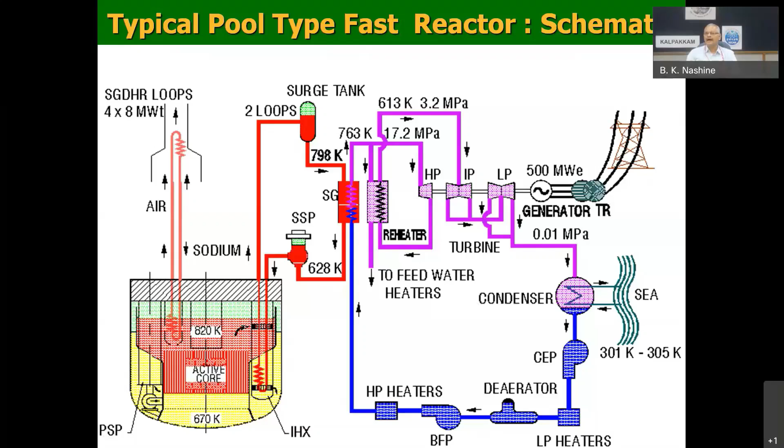The sodium-cooled fast reactor comes in the second stage of the Department of Atomic Energy's program, where the schematic is shown to you, and the coolant used in this reactor is sodium. The fuel is kept in a pool where sodium acts as the primary coolant, and there is a secondary coolant, also sodium, which takes heat from the primary and transfers it to the tertiary, where water is converted into steam, and then finally runs the turbine which generates electricity. So sodium plays a very important role in the fast reactor program.

To have this fast reactor program successful, we have to carry out various tests in a sodium loop. The characteristic of sodium is that it is a very good coolant with very good heat transfer capability. At the same time, sodium is chemically very reactive, and the operation of the sodium loop and the reactor is around 600 degrees centigrade. So any component going into the reactor has to be tested thoroughly before going into the reactor. Hence this requirement of the sodium loop comes.

Apart from that, there are various components which are conventionally used in other engineering systems but cannot be used in a sodium system. So they have to be designed to make them compatible with sodium. An example is different types of mechanical pumps as well as electromagnetic pumps. Now the topic I have chosen, my field of work, is the electromagnetic pump. I am switching over to that.

This is the basic characteristic of the electromagnetic pump: it doesn't have any moving part, and that helps this pump to be made very hermetically sealed, and leakage of sodium is avoided.

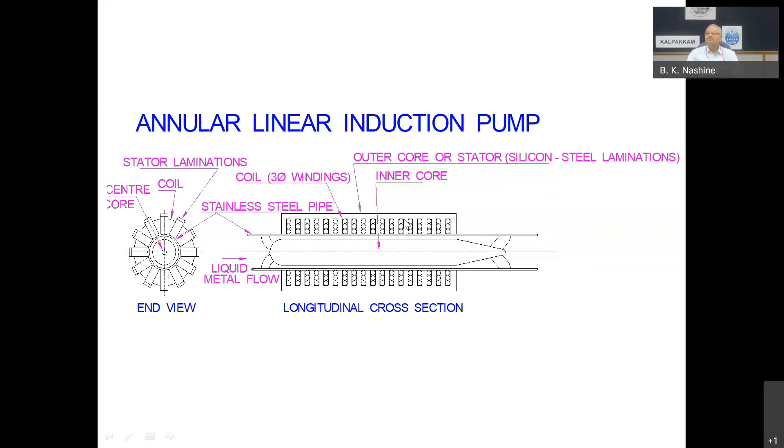This is the same principle as indicated in the previous slide. You can see that the magnetic field is radial and the current produced is circular. The interaction of this radial magnetic field produced by the outside winding and the current produced in the sodium causes a force F in a mutually 90-degree direction, and this force pumps the sodium in the pipe, which is in the annular gap.

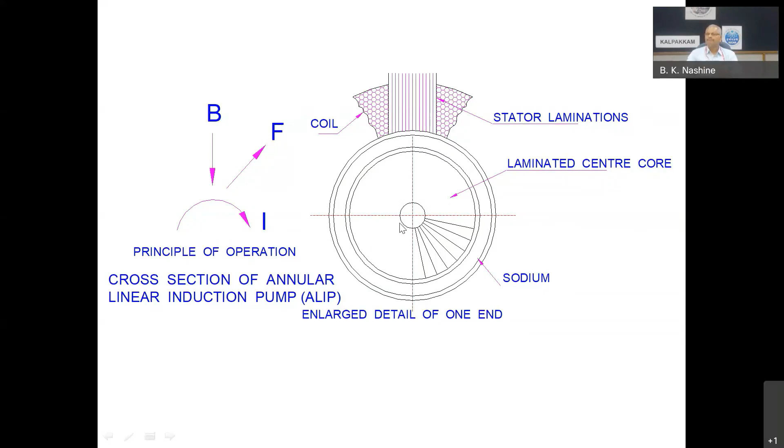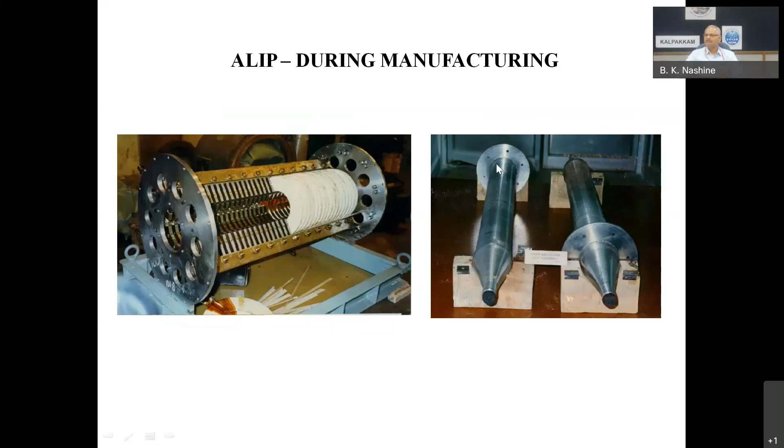This is the picture of the ALIP which has been manufactured. This is wholly designed by us and manufactured in India. We have indigenized this technology, and nowadays it is available in our country. Whatever reactors we are commissioning or installing in Kalpakkam, these types of pumps are used in all our auxiliary systems. Different capacities of pumps have been designed and manufactured in India, and installed in the prototype fast reactor at Kalpakkam.

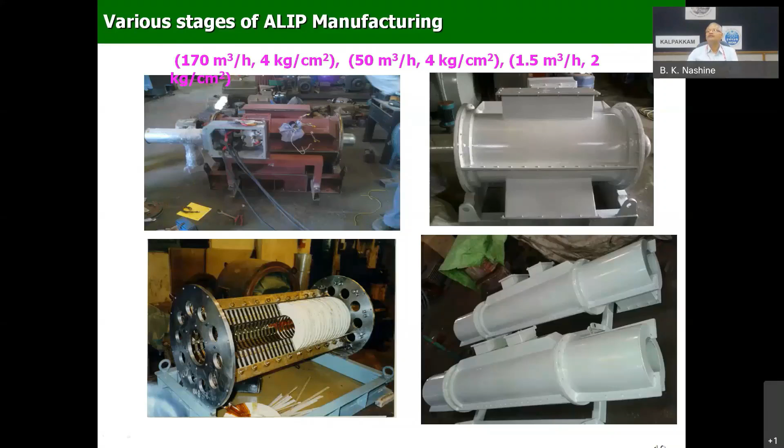So a new pump was developed based on the same principle. Only thing is, the winding is a different type. In the previous ALIP, the winding has organic insulation, whereas here it is mineral insulation. This winding can withstand up to 600 degrees centigrade.

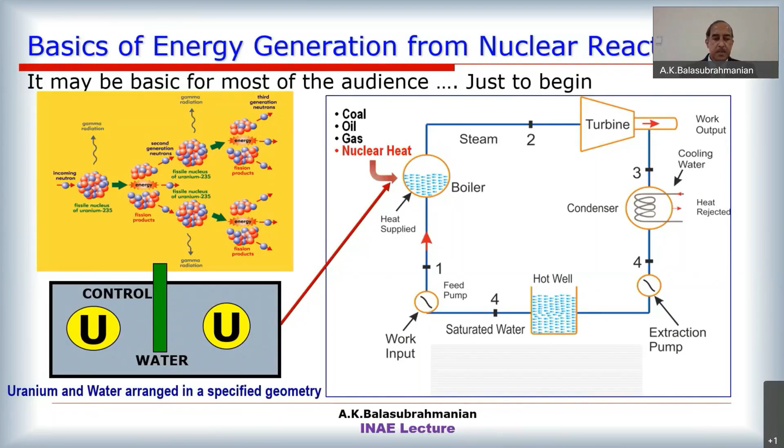To start with, you are all familiar with the fission process, which generates energy as well as multiple neutrons, allowing us to continue a nuclear chain reaction. On the right-hand side of the slide, I have shown the steam power plant cycle. The boiler is replaced by the nuclear reactor, where a particular arrangement of the fissile material, that is uranium, and moderator and coolant with control devices is put.

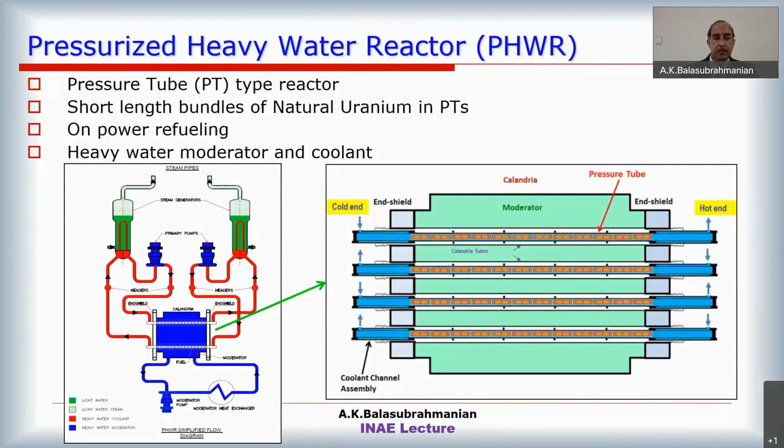Now, if you look at the saga of pressurized heavy water reactors, we can see in the initial phase of the program it went through a good amount of indigenization, standardization, and then commercialization with a capacity of 220 megawatt power. At some point it was thought we could go for higher power, higher sized reactors to reap the benefits from economy of scale, so we started with 540 megawatt, and today we have the 700 megawatt PHWR, a reality.

So I'll be focusing on these two reactors in the next few slides. When we go for a higher sized pressurized heavy water reactor, it calls for certain changes in the systems, primarily because of larger core size.

Due to the larger core size, we need what is known as zonal power control, which controls the reactor in 14 zones. So a new system was developed. Similarly, the shutdown system was changed to direct injection of the neutron absorber into the moderator. This also required a large number of in-core SPNDs, self-powered neutron detectors, and so on.

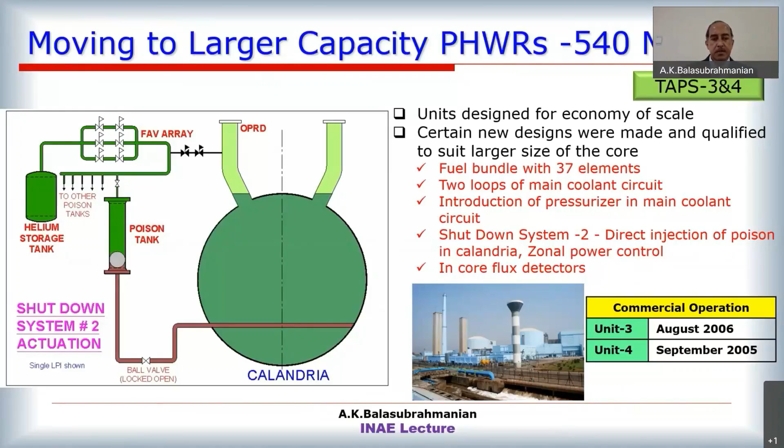This was implemented successfully in Tarapur 3-4, and based on the feedback and experience obtained, the next size of 700 megawatt PHWR was launched. Essentially, the core design was kept the same, and changes were made in the coolant system and thermal hydraulics.

Many improvements in the safety-related systems were introduced, which called for many first-of-a-kind systems and features. One additional point is design extension conditions, that is beyond design basis scenarios, were addressed in the design and accident management program. This is one of the highlights of the 700 megawatt reactor.

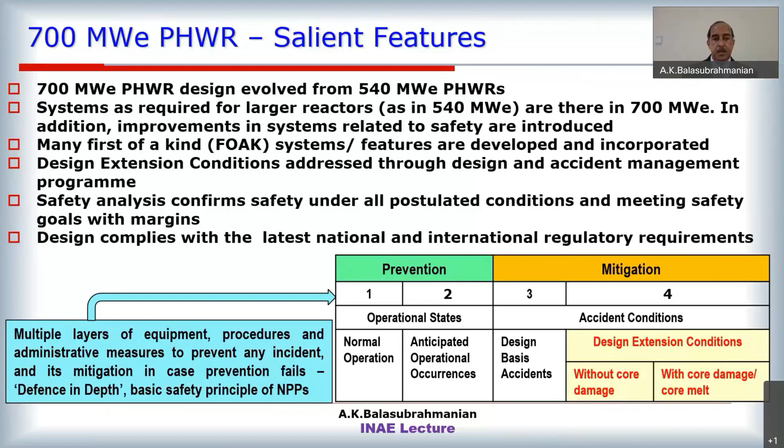Based on this, the design and development analysis—safety analysis—was carried out to confirm safety under all postulated conditions and meeting safety goals with margins. So this is a state-of-the-art reactor.

Now I'll be concentrating on the 3 C's as they are known: power control, cooling, and containment. In the first part, power control, as I mentioned earlier, the 14 zones are controlled by the zone control system. The information for the zonal flux levels is obtained through 3 pitch long SPNDs.

Shutdown system 2, as was done in Tarapur 3-4, was used here. Now I move on to core cooling.

Generally, core cooling is ensured by forced circulation through pumps, and in shutdown conditions there is a dedicated shutdown cooling system. If forced circulation is not available, thermosiphoning is used by keeping the elevation difference between the core and the steam generators as per the requirement.

In case of a requirement, there is an emergency core cooling system, configured as 2 trains. This is again a new arrangement included in the 700 megawatt design.

Coming to the containment, the 3rd C, it's a double containment. The inner containment is lined with steel liners, which means in case of any radioactivity inside the containment, the leakage will be considerably less, thereby the dose outside will be significantly lower.

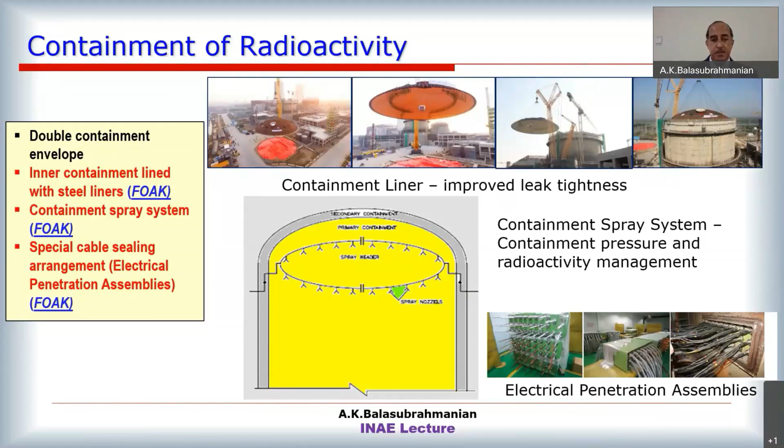As I mentioned earlier, design extension conditions are addressed for each of these functions. Initially, for fuel and core cooling, there is a passive decay heat removal system, which is a first-of-a-kind system that helps in cooling the core in case of extended unavailability of power.

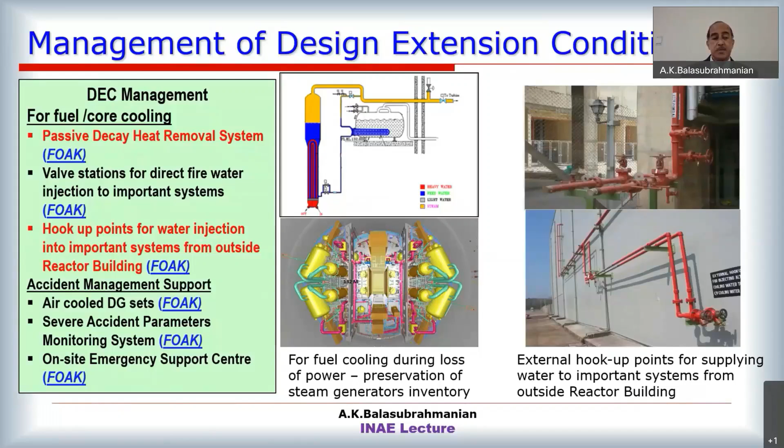Similarly, a large number of hookup points are provided to send water to various systems for extended duration of cooling. Dedicated air-cooled DG sets are provided, and so on.

With respect to the containment, one important provision is passive catalytic recombiner devices. As you know, in case of a very unlikely, very low probability event of core damage, there is a likelihood of generation of hydrogen, which will come into the containment. So in order to reduce the concentration of hydrogen, passive catalytic recombiner devices are kept at various locations, which will ensure that the concentration of hydrogen in the containment does not go beyond a certain value.

One more provision has been made, the containment filtered venting system. Since the containment is the ultimate barrier, its integrity has to be ensured. This is done using a filtered venting system, which can control the pressure inside the containment.

Such provisions are built in to address various postulated design extension conditions. I must mention that in the original design of the 700 megawatt reactor, all these were already included, and after the Fukushima accident, these provisions were, or are being, backfitted in the earlier 220 and 540 megawatt reactors.

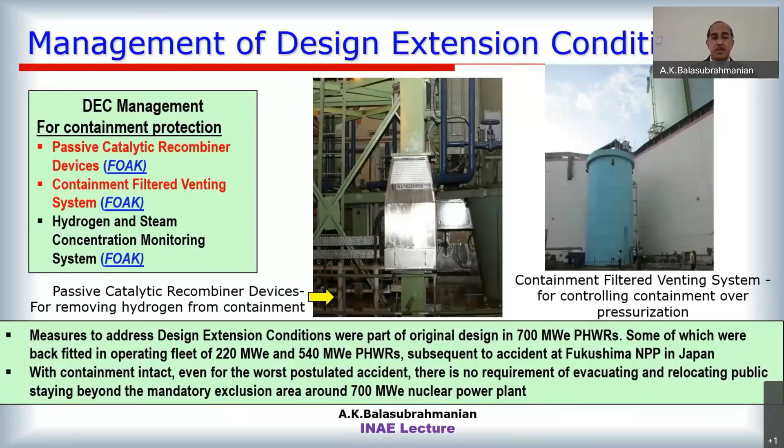All this was made possible through basic design work and a large amount of qualification. First-of-a-kind system qualification was carried out.

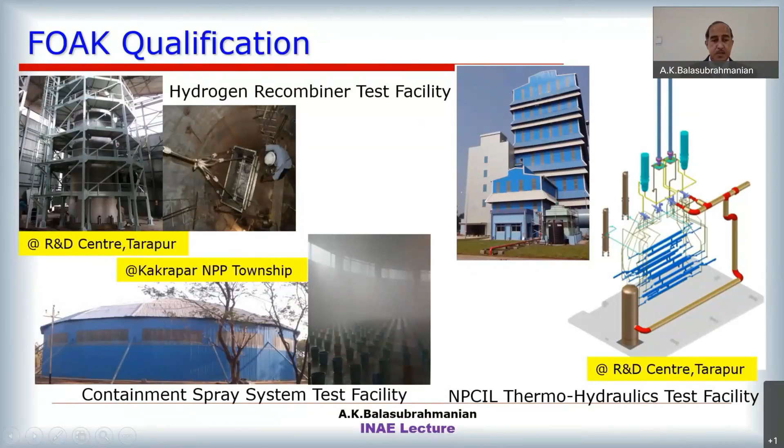For example, the left top picture is a hydrogen recombiner test facility, a world-class test facility in the R&D center of NPCIL Tarapur. Similarly, there is a very elaborate thermal hydraulic loop for testing all these systems for validation.

Lastly, a word on aging management. All the PHWR power stations require very good aging management on various components.

I'm highlighting one such requirement pertaining to the coolant channel, called pressure tubes, where the fuel is located and high pressure, high temperature coolant is passing. By virtue of the high level of irradiation in the reactor, this material undergoes irradiation damage.

So it is very important to monitor the health of this component, this tube, through a very elaborate in-service inspection done at predetermined intervals during the life of the reactor. A detailed analysis for fitness for service is done, and in case of any particular issues, root cause analysis is carried out very elaborately.

Every time it is ensured that the tubes are fit for service before clearance is given. At some point, when it is really required to replace these tubes, provision has been made in the design to replace all of them, called en-masse coolant channel replacement. This provision allows safe and continued operation of the nuclear power plants.

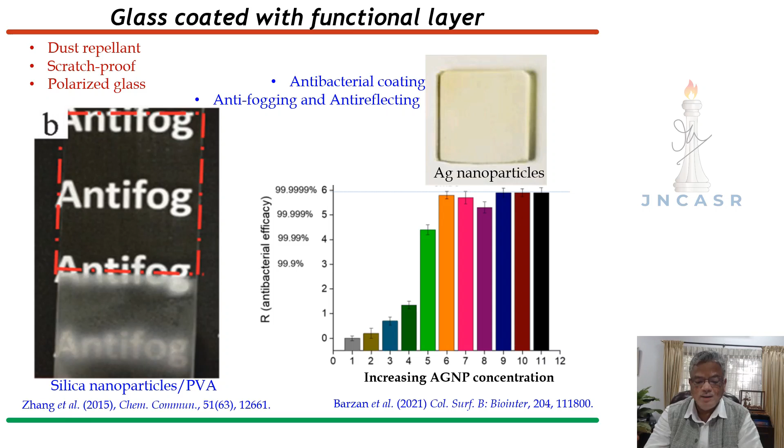With the advent of nanotechnology, several more technologies are emerging. For example, from the literature: making glass anti-fogging by coating silica nanoparticles mixed with polyvinyl alcohol as a composite. Similarly, by having a layer of silver nanoparticles on top, glass becomes repelling—it doesn't host bacterial species on top, becoming antibacterial and antiviral. Such results are in the literature, but I'm not going to address any of those today.

Rather, I shall focus on one sector: smart windows. Take ordinary glass and work with it such that you don't need curtains anymore—glass can control the ambient light passing through it at our will, on-demand. This is important because large glass panes covering windows and buildings let in a lot of sunlight, costing energy since one has to maintain air conditioning inside. At will, one should be able to control bright light entry and save energy. People talk about zero energy buildings, and in that context functional glasses and smart windows are becoming extremely important.

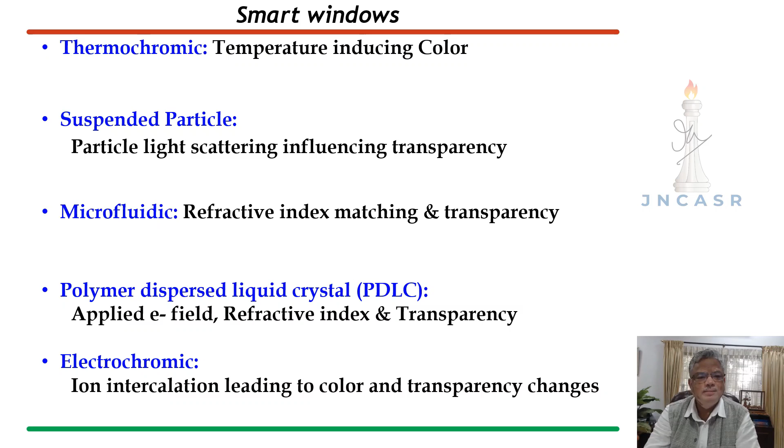There are many technologies. In the given example, I'll cover briefly how one is able to switch the transparency of the glass, even for indoor applications. There are many technologies: thermochromic, suspended particle technology, microfluidics, polymer dispersed liquid crystal (PDLC), and electrochromic-based transparent smart panes or smart windows. I shall focus on only 2-3 technologies given the limited time.

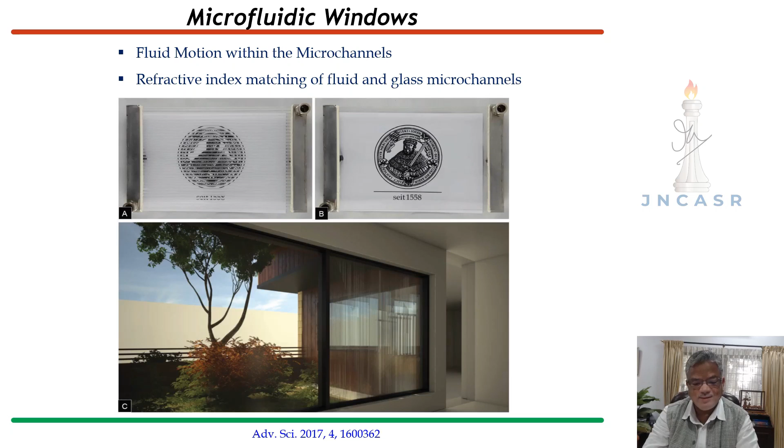This is the microfluidic window—there are channels carved into the glass, say between sheets, through which a liquid is passed. If the liquid has a refractive index matching the glass itself, then the presence of the liquid in the microfluidic channel is no longer seen because of this refractive index matching. It goes hidden, in which case one can see through the window and it looks just like glass itself. This is the concept behind microfluidic windows.

PDLC windows, on the other hand, work with liquid crystals. These are liquid crystal layers in which small liquid crystalline domains remain randomly oriented. Only upon application of an electric field do they get aligned, and in the aligned state there is refractive index matching, along with several other physics concepts. In the end, when the liquid crystals get aligned due to the electric field, light transmission takes place, and that's how they become transparent. It's important to note that glass must enable electric field application, meaning the glass itself has to be conducting—I'll come to that in a minute.

Again, electrochromic smart windows are yet another technology many of us have come across. Sitting in aeroplanes, you can see the passenger window pane is user-controllable—you can control the transparency just by applying an electric field using a toggle, and it can differentially get colored. What's happening is there are active layers between glass panes, doped with ions internally, and with increasing doping of ions they get colored. This is a solid state chemistry principle made into an application. Each such window has two glass panes which are optically transparent like glass, and also electrically conducting, because you need to apply the electric field for the window to function.

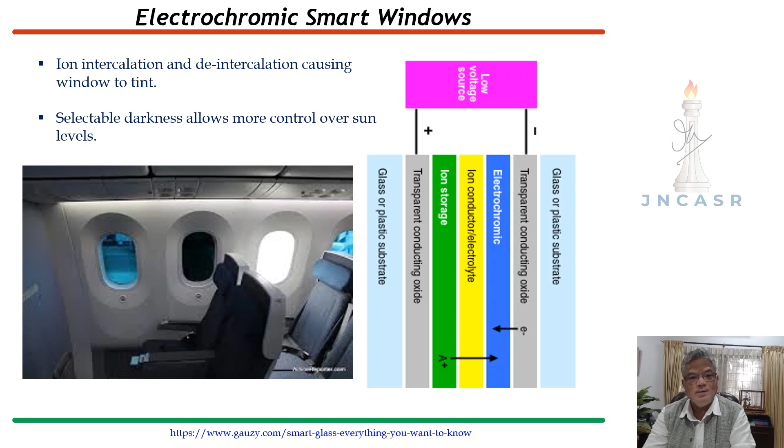That's an important aspect related to the technology development of glass. The point is, none of these windows we've discussed are in practice actually used, except in high-end applications like aeroplanes. The reason is glass per se is not easily available as conducting. By its nature, it's a wide band gap insulator, and it doesn't conduct electricity at all. So one has to impart electric conducting nature onto the glass by some other means.

And there are several technologies, and they're all rather expensive. One commonly used technology is to coat it with indium tin oxide. Let's not forget, indium is as expensive as silver, but it is not recoverable at all, unlike silver. So you have smartphones, you have televisions, everywhere glass is made conducting by coating it with ITO. Now you can imagine the usage of ITO across the world - it's enormous, and actually indium is getting depleted.

The issue related to recovery is a big problem, because whatever gets used in a device is just trashed after the life of the device itself. There are many other disadvantages of ITO, let's not get into that. And again, with the advent of nanotechnology, people are now looking for alternatives to ITO - how to bring conducting nature to the glass pane using other alternate technologies.

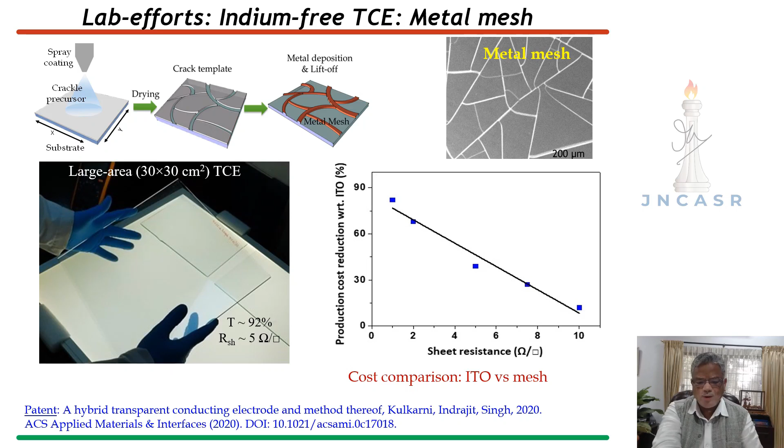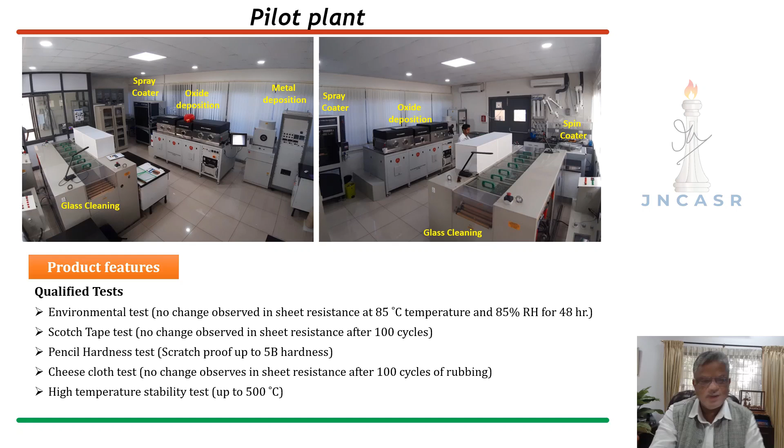And that's why the price difference is enormous compared to commercial ITO and what we are able to produce in our semi-pilot plant. This is the actual so-called factory - we call it a factory, but it's essentially an R&D lab, semi-pilot plant, where we are able to produce day in, day out, around 50 to 100 such pieces of glass, big size, around 1 square foot. And these can be actually put to use.

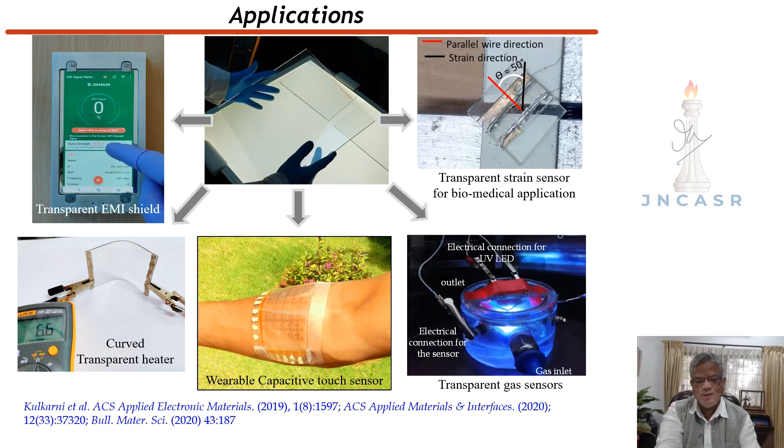You can see lots of devices emerging from the lab. All of them are transparent-type futuristic technologies implemented using this kind of electrode system. And I just want to show you one or two results from Smart Window itself.

Now, electrochromic as well as microfluidic approaches are being brought together - that's the ongoing project. And it's time to thank my colleagues here, a bunch of co-workers and PhD students, and also collaborators from within India and from abroad and from industry.

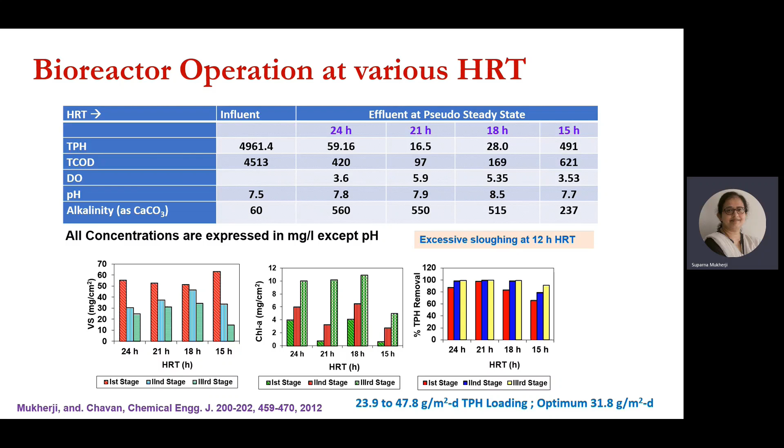After more than a year, when the system was dismantled, there was quite a bit of oil sorbed onto the biofilm. So the part that is not getting degraded remains absorbed onto the biofilm. However, that oil does not have any of the aliphatic components; it is mostly the undegraded part that remains absorbed onto the biofilm.

Now I'll talk regarding our work on disinfection of water using immobilized silver nanoparticles. These are citrate capped nanoparticles prepared using the borohydride reduction method, with mean size 8.54 nanometers. These nanoparticles were attached onto an amine functionalized glass surface, where the amine functionalization was done using APTMS through a series of steps. This provided good attachment of the silver nanoparticles to the glass substrate, with loading of 3.26 microgram per centimeter square.

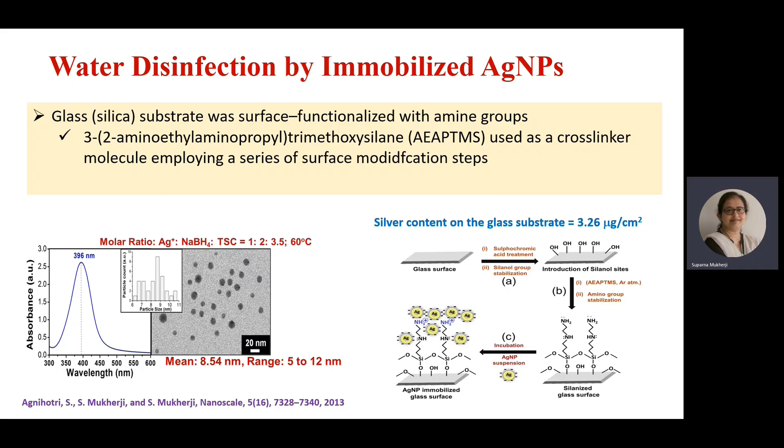Subsequently, 1 centimeter square of this glass substrate was dipped in 100 ml of water under static condition, and 10 to the power 3 CFU per ml of E. coli was disinfected in the system. Complete disinfection could be achieved within 50 minutes, and this system could be reused multiple times. Leaching was also studied, and silver leaching into water never exceeded 25 ppb.

However, there was some removal of silver during the multiple cycles of reuse from the surface.

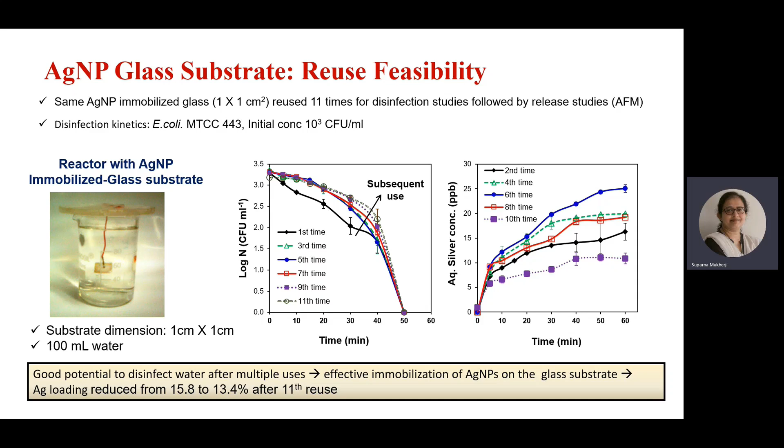Now I'm showing a comparison of performance of this AgNP glass with colloidal silver nanoparticles of the same mass and same size. You see that the colloidal silver nanoparticles are less effective than the AgNP glass substrate.

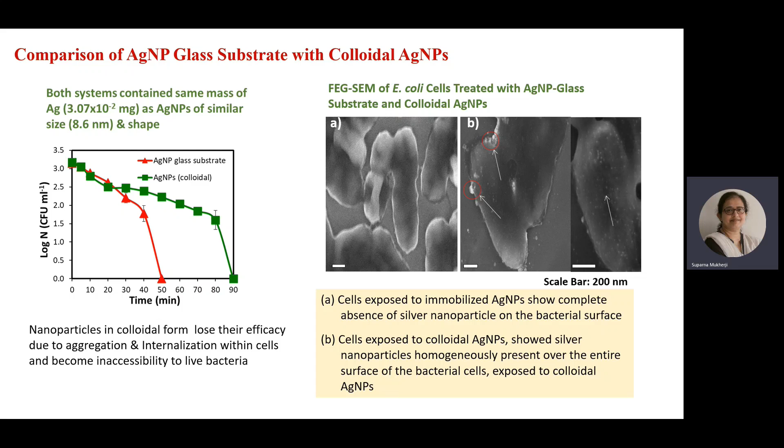This is primarily because the colloidal nanoparticles get internalized within the microbial cells. As a result, they are not available to other microbial cells, and these nanoparticles aggregate over time and lose their efficacy. When we look at the surface of the microorganisms using FESEM, we see that for the AgNP glass there is no silver on the surface, but there is silver on the surface for those treated with colloidal nanoparticles. So the mechanism of the two systems seems to be different.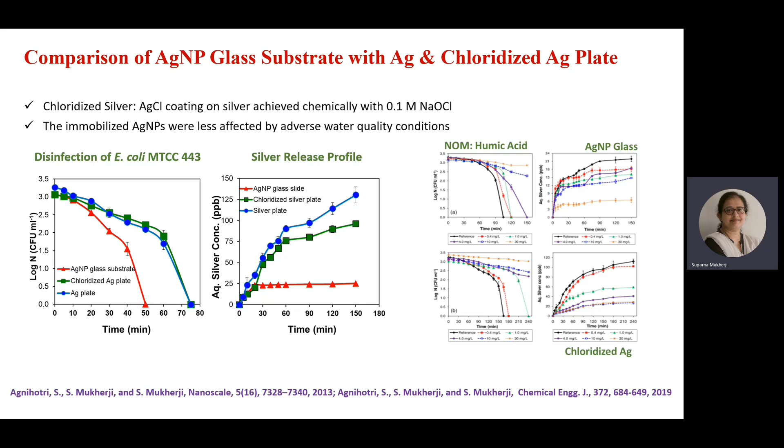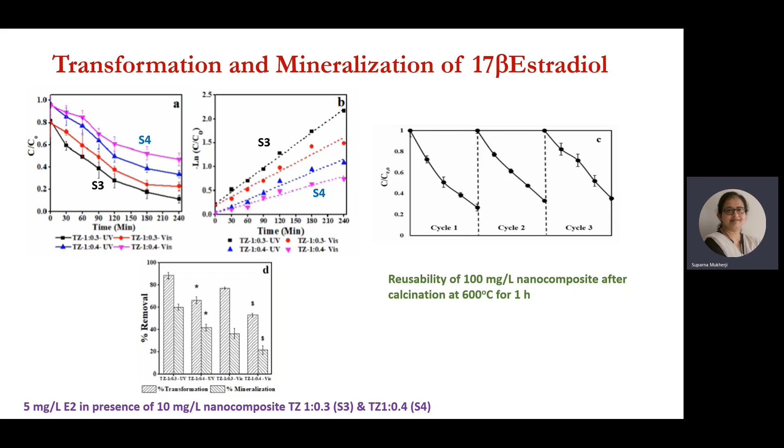Along with transformation, we also saw significant mineralization happening, which was evaluated through TOC removal. Subsequently, we also looked at the reusability of this nanocomposite, and it could be reused multiple times with an intermediate calcination step of about an hour.

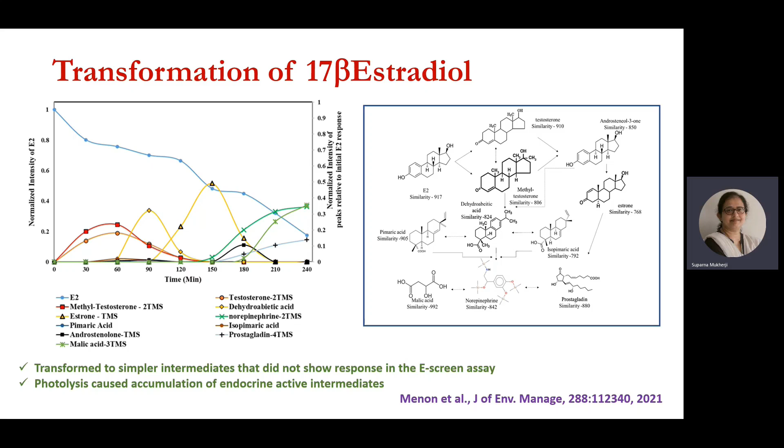While it was getting transformed, 17-beta estradiol formed products during photocatalysis that were no longer estrogenic, as evaluated using the E-screen assay to look at estrogenicity changes. Over time, the 17-beta estradiol was transformed into intermediates that were not estrogenic, and quite a bit of it was also mineralized. However, when only photolysis was used, without any nanocomposite, we found that there were intermediates formed that were estrogenic in nature, so the estrogenic activity was not removed through photolysis alone.

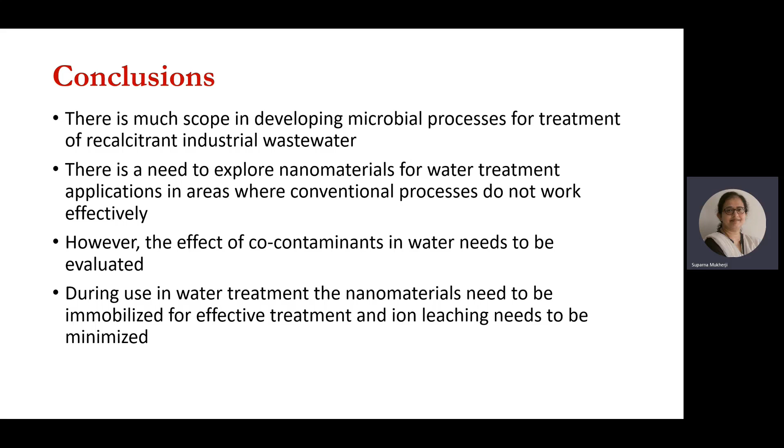In conclusion, there is much scope in developing microbial processes for treatment of recalcitrant industrial wastewaters, and there is a need to explore nanomaterials for water treatment applications in areas where conventional processes do not work effectively. However, the effect of co-contaminants in water needs to be evaluated, and during use in water treatment, nanomaterials need to be immobilized for effective treatment, and ion leaching needs to be minimized. These are the concerns to be kept in mind when developing nanomaterial-based processes.

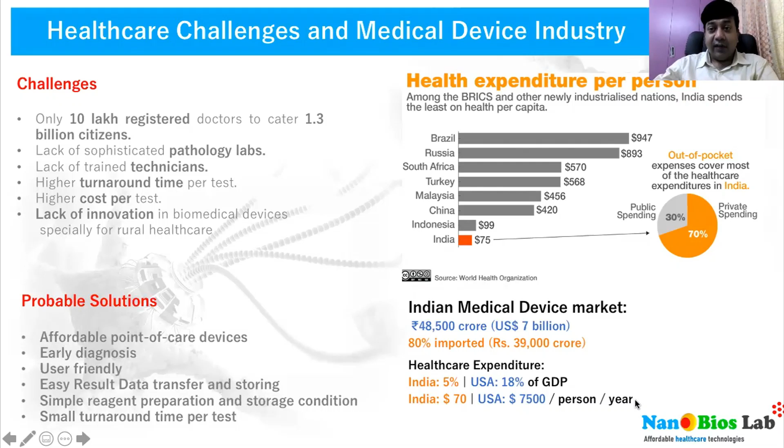And this is the biggest solution that one can provide to this country. So the solution is that we can make affordable point of care devices, affordable technologies, affordable therapies, whatever. But they have to be able to have simple reagent preparation, simple storage conditions, simple training, and everything should be easily available to everybody. With that in mind, our lab works on several different domains.

We are part of bioengineering in the department, which means that we have several verticals to work under. So we work in therapy, which is nano-based drug delivery, nano-based cancer therapy, nano-based orthopedic materials, and many such things under nano.

We also work on diagnostics and devices. So we work on paper-based diagnostic devices. We work on solution-based assays. We work on paper-based assays, all of them being integrated with readers. And we also work on several MEMS devices as well. So we have micro needles and micro pumps that we are also working on. Many exciting things happening in the lab.

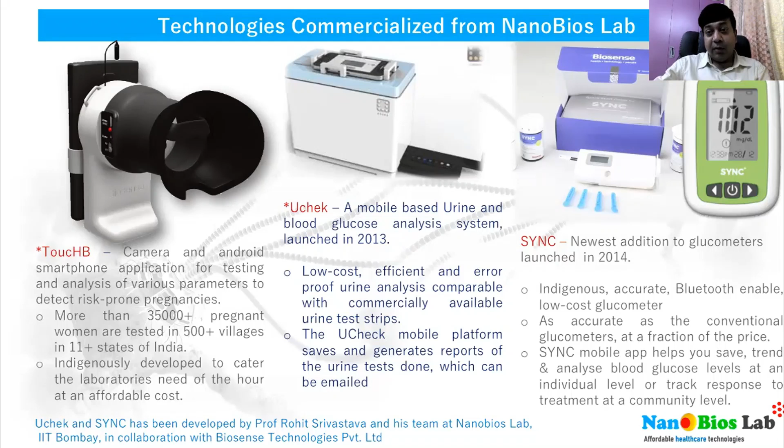And it was the most affordable glucometer and strips to have come in the Indian market. The one on the left side was the one that Biosense put in the market for non-invasive hemoglobin monitoring. That also became a big commercial success.

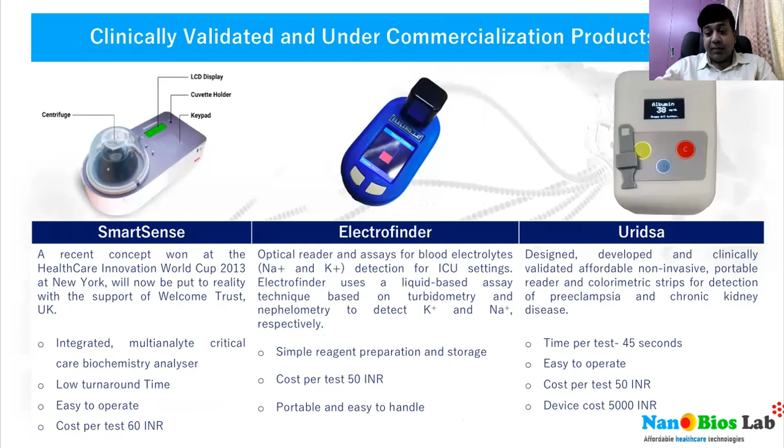If you look at several things that happened in our lab, there are many other projects. We went through several such projects with Biosense Technologies. We did a SmartSense device, a point of care device for critical care analytes. We also did a Uridsa device, just for albumin and creatinine. And we did a small device called Electrofinder, that could do sodium and potassium at bedside. Many such products came out from the lab, and they have all been clinically validated.

Many important things that happened in the lab started with this first example you see on the screen, which was UCheck. UCheck happened because the student and I were passionate about taking an idea all the way from lab to market. Let me remind you, this was in 2009 when translation was just a keyword. We were the first people in those times to show that something from the healthcare domain could go all the way from an idea to commercialization in about 18 months and create a market for itself. UCheck was one such example.

We did a lot of surveys, figured out what the problem was in these path labs that we surveyed, figured out what solution we could put to them, and came out with our own solution, which is what you see on the screen. This is an image-based CCD array sensor using a mobile phone. This mobile phone could take images of the strip at the base, one after another at time points, which would determine the end point of that color reaction on the strip.

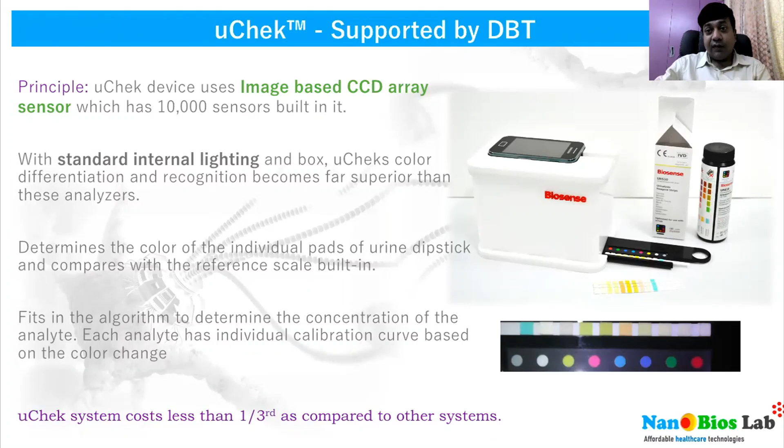Finally, we could tell you exact values of the analyte we were trying to detect. If you look at the analytes, these were the 10 parameter urine dipsticks. There was also a 10 plus 2 parameter, which included albumin and creatinine. Compared to the market, we were at least 1/3 to 1/5 cheaper than what was already existing. Plus, we did not have a bulky reader with it — we were just using a mobile phone. So that became a big commercial success.

We went on to our second product, which was Suchek. At that point, ICMR invited several people in this country to come and work on an indigenous glucometer project. When we started working on this, again, we looked up what the background was.

Most importantly, you have to do a clinical study. You have to figure out where the gaps are. You have to do a patent search to figure out where somebody could hit you with a patent infringement. And then you actually start working on a project. So never start a project, do it, and then go back one or two steps. Always start from finding the problem and then go ahead to find a solution.

So when you do that, we figured out what blood glucose monitoring could lead to. Of course, the chemistry is known to all of us — it cannot be protected, it's a known chemistry, and everybody uses it. So we were free to use it. The only difference we made was using color pads and ratiometric sensing, so that we could give correct values.

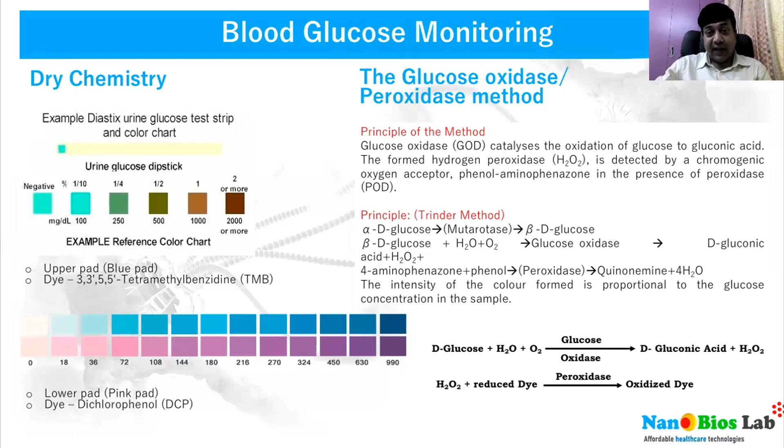We came out with our own strip, our own reader, and also did a Clark's error grid analysis of these strips, and figured out that more than 95% of the results were within zone A of the Clark's error grid, which meant this device could pass all the tests and go on to be commercialized.

This was possible because it then went through the entire approval process, finally got approved, and got released in the market. It made a big impact in this country because at that point, ICMR had given us a target of 2 rupees per strip. Of course, we couldn't meet that target, but we were able to do 5 rupees per strip.

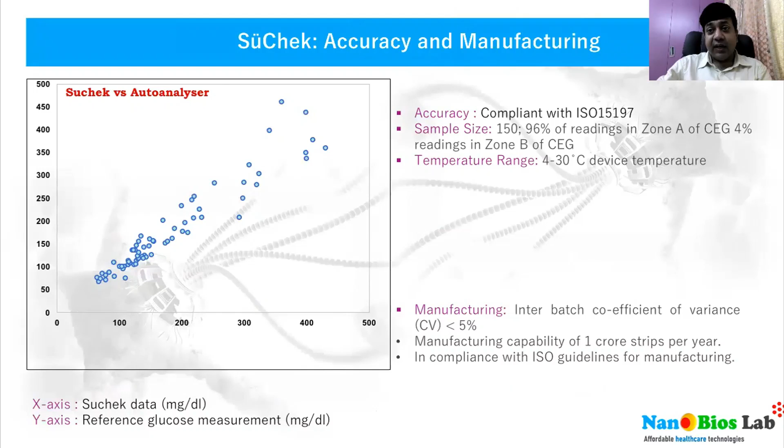We priced each of these 50-strip bottles at 250 rupees. They had the manufacturing capability for a large number of strips per year. And there were several features with this glucometer that we then had to make sure could be integrated into the newer version as well.

So there were many things happening in the lab at that time. We also started working on a Wellcome Trust funded project, for which we won a big prize from HIT Labs, New York, USA. We were fortunate enough to submit this project to Wellcome Trust UK under their Affordable Healthcare in India scheme. We were asked to come to London and present the proposal, so we presented the concept we had in mind, our solution to the problem, and we were funded by Wellcome Trust to take this project forward.

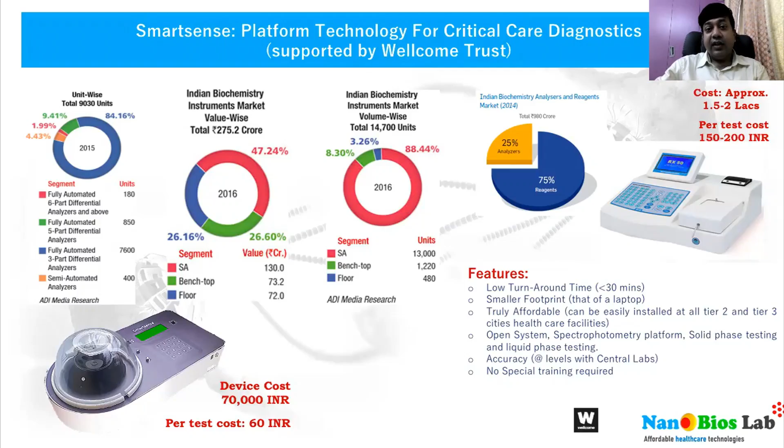What you see here is our end goal for the project, where we proposed a point of care monitoring system for critical care analytes. This included sodium, potassium, glucose, pH, chloride, and urea. Many of these we were finally able to validate with samples received from KEM Hospital. We had ethics committee approval from there, and were able to do all the clinical validation and show that the data was robust enough to be transferred to the company, and finally transferred it to Biosense Technologies.

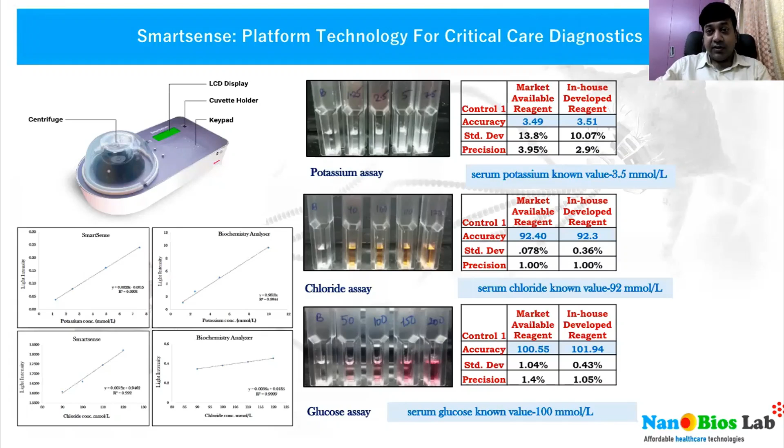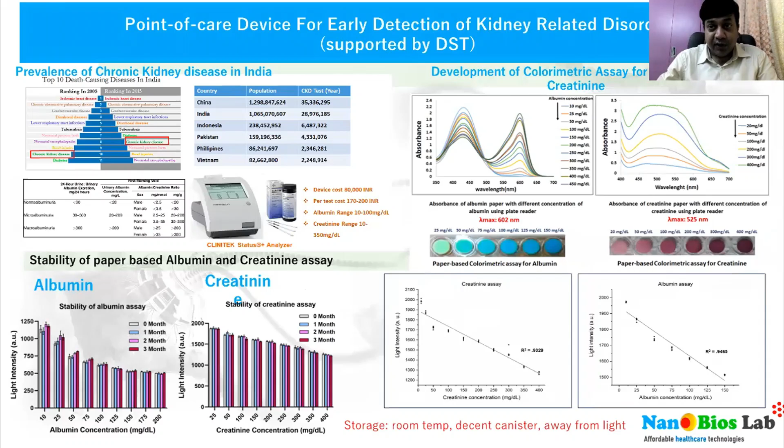So the business model was that we were making cuvettes, and the cuvettes is what we were selling, and we weren't worried about the reader, which was actually a really cheap reader that we had made for this. We went on to make many such versions. We also worked on an albumin creatinine ratio sensor using ratiometrics, again with color strips, and the reader which was made. Then there was a lot of data generated from hospitals which proved the robustness of the data.

Microneedles is a terrific area because there's a lot of emphasis now on delivering vaccines, and if we can make these microneedles stable with the drug, with the vaccine, then there is a lot of potential for creating a supply chain for vaccine delivery. So we have worked on silicon microneedles, we have worked on polymer microneedles, and both have been big success stories, as you can see from our lab.

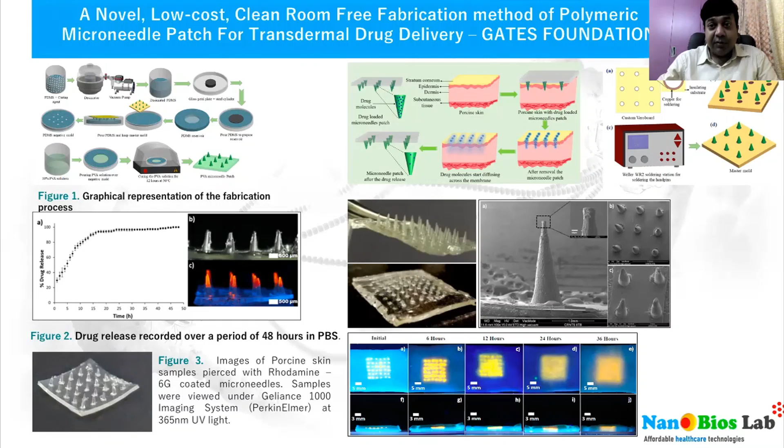We have actually shown delivery of model drugs from these microneedles. We are also working with another company to take this forward. There was a concept in our lab in those times where we showed that you could put these microneedle patches on the backside of a smart device and make sure that on the press of a button, an amount of drug went into the skin. So this concept caught on really well.

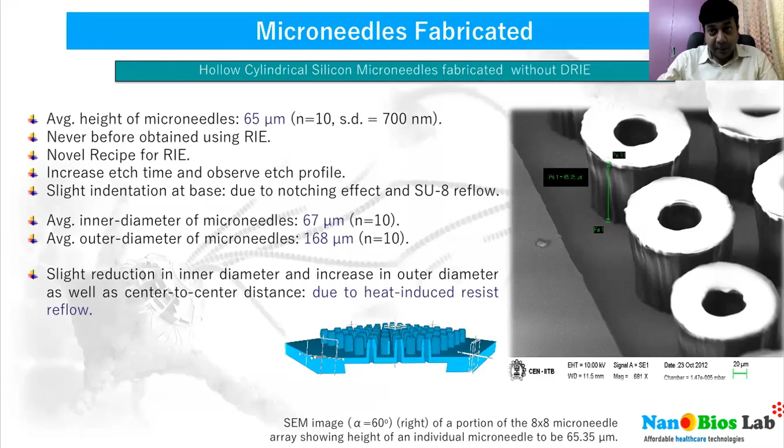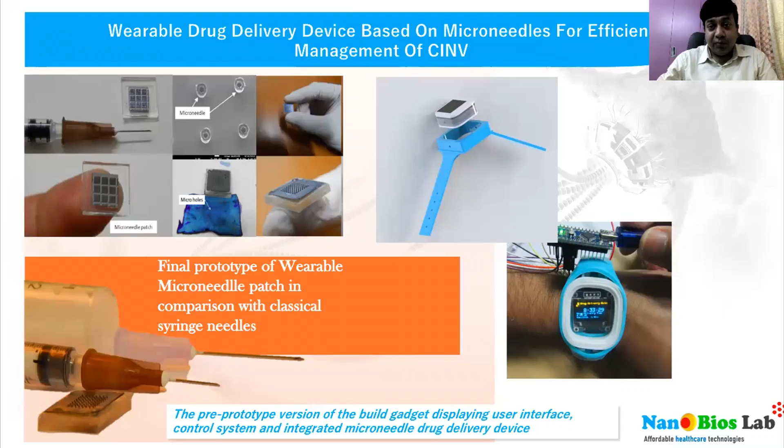One PhD student started working on the idea, and we were able to show a lot of data around this. We prepared the microneedles in IIT Bombay's micromanufacturing facility. We actually went on to compare these microneedles with what existed in the market for drug delivery. We went on to make our own smart device, attach the microneedle to the smart device along with a micropump, and then showed that we could actually deliver drug.

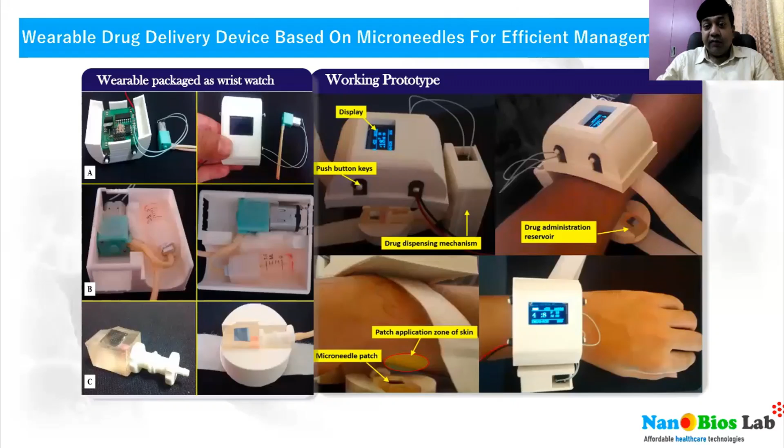So the final prototype went through a lot of iterations. These were the iterations that we went through, where we showed that these microneedles were able to deliver drug. As you can see in this figure, on the press of a button, you could actually modulate the release of drug, and you could do a drug release in any pattern that you wanted. So this again has a lot of promise for the future.

Many other things we are working on. I've been associated with BIRAC for the last 10, 12 years now, as an expert member in most of their panels. What I have learned sitting there is that there is a terrific ecosystem now in this country, all started by Dr. Bhan when he was in DBT, and later continued by Dr. Renu Swarup, who made sure that there were a lot of schemes brought forward to take academic research into commercialization. There's one such scheme in BIRAC called academic innovation research, through which they fund academic research and make sure it goes all the way from TRL1 to TRL9.

This was one example where we pitched for a project under BIRAC and wanted to do total cholesterol, HDL, LDL, and triglyceride monitoring in strip format and in liquid assay format.

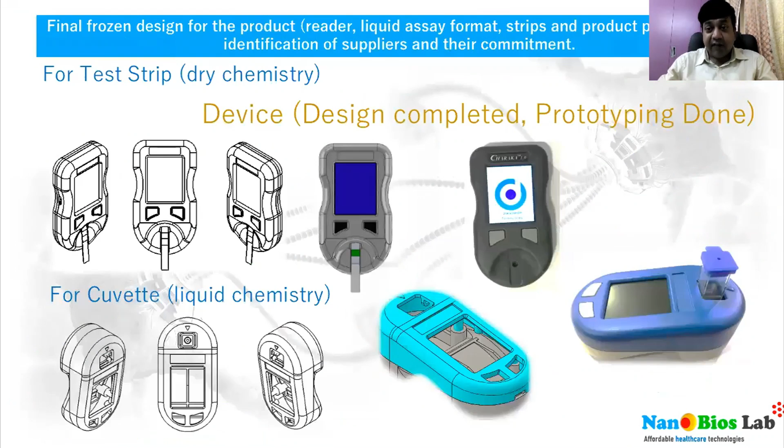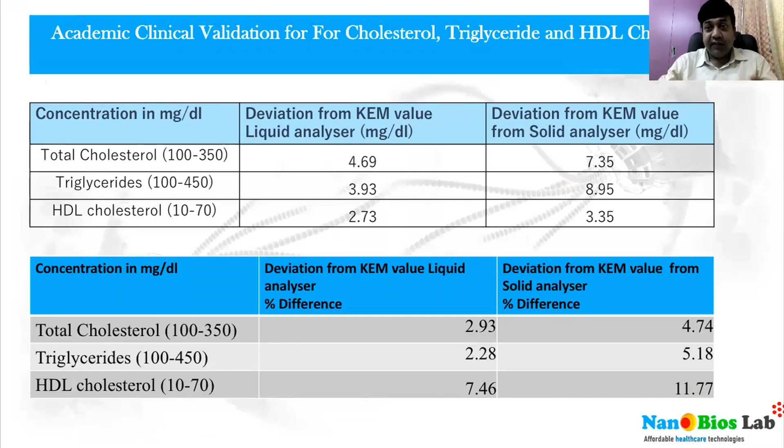And we pitched for a project under the AIR scheme and got it funded. We went on to show all the data under the AIR scheme, as you can see here, made a device for it, made different versions of the reader, made sure that we tested it in a hospital setup, and made sure that the data was robust enough to be taken back to BIRAC for a contract research scheme, which is the second phase of this project, taking it from TRL4 or 5 to TRL9, which is commercialization.

And all of these are adding value to the country's ecosystem because many of these have potential to move forward in either a startup or technology transfer, which can benefit this country.

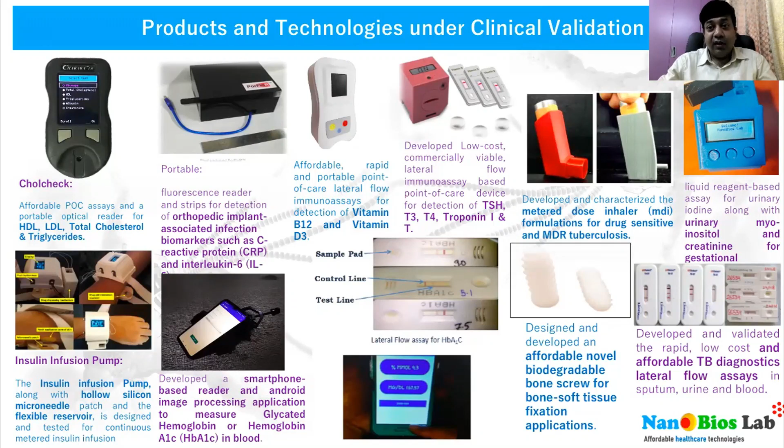We also do a lot of social innovation with all the stuff that we've done in our lab. We want to bring them under one umbrella and do malnutrition screening and anemia screening in this country. We've actually got a center of excellence funded by DBT, which gives us now the scope to look at screening of children and women in Maharashtra as well as in 2 states in the Northeast.

So using all these products that you see on this screen, we'll be able to do screening, and all these products are from my student companies. Many of these products are selling very well in the market, and now they have potential to scale up as well. With data that we provide to the government, we hope that it will actually help the government tackle the problem of malnutrition as well as anemia.

We also have a student who set up CareNX Technologies, and he's got a product called Care Mother, which can do tracking of pregnancies from 0 to 9 months and can actually give you data that can detect high-risk pregnancies and refer them to a tertiary or secondary hospital so that they can be taken care of. He's already saved a lot of lives in this process.

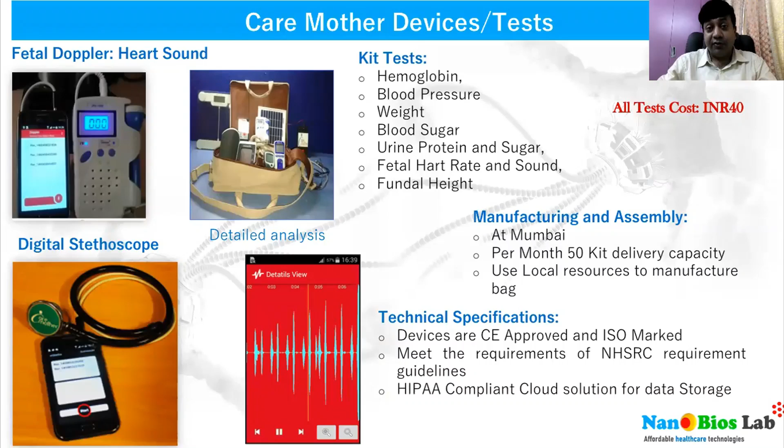I'll just go through some of this data, and we make sure that we showcase our work to the government. The Honorable Prime Minister has visited IIT Bombay and was very appreciative of technologies being worked on in our lab as well as other labs in IIT Bombay.

And there were many things that we've actually received big awards for. But this is all due to the work of students, and we hope that the students keep working hard and harder so that we can earn more laurels for our country.

We make sure that we present our work at several places. We always do workshops. We always do exhibitions so that we can teach students what is happening in our lab. We always give internships to students so that we make sure that others are also able to use the facilities of IIT Bombay and learn from what we can actually show them.

We have a big partner network: different IITs, different institutes, hospitals, several startup companies, incubators, industries, and a very large lab. At some point, I had more than 50 members in my lab, and we used to run it like a company because we wanted to make sure that more and more products were being worked on in the lab and more patents were being filed.

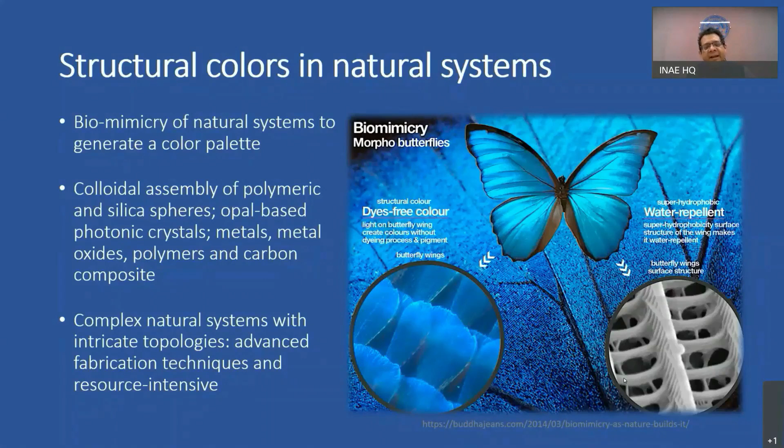So what we envisage is: is it possible for us to come up with synthetic molecules from the biological realm, and can we redecorate surfaces to create structures which have periodicity, such that if light is incident on them, we are able to generate colors in a varied color palette that could come out of interaction of light with these materials?

This particular slide shows the molecules that we have used to put on the surface. You can look at the scanning electron microscopy images that show these oval morphologies being decorated on the surface. We have done quite a number of studies based on focused ion beam interaction with these molecules to study their ability, and we were able to take this structured surface for study by putting light incident on these surfaces.

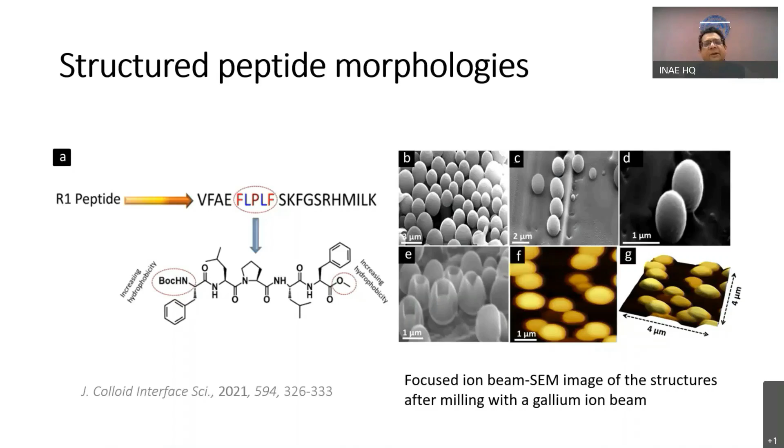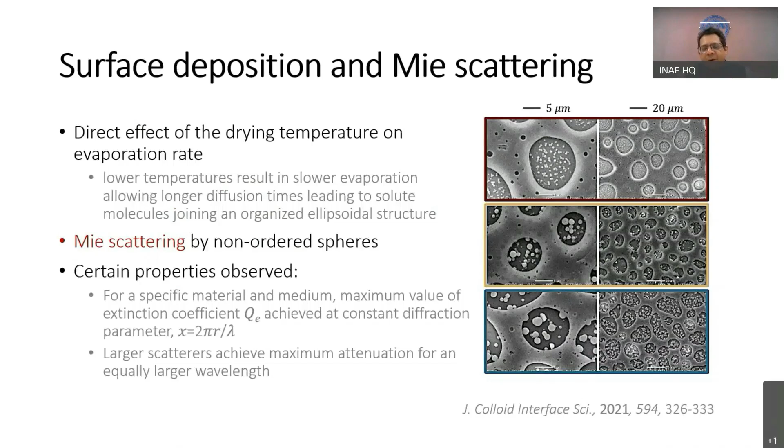What we were very amazed to see is that when you dry out these molecules on a surface, you get non-ordered spheres within a larger area of the surface where we have spread out our molecule. Eventually, with the help of the Mie scattering phenomenon, we were able to incident light and generate colors through a colored palette, which is shown in the next slide.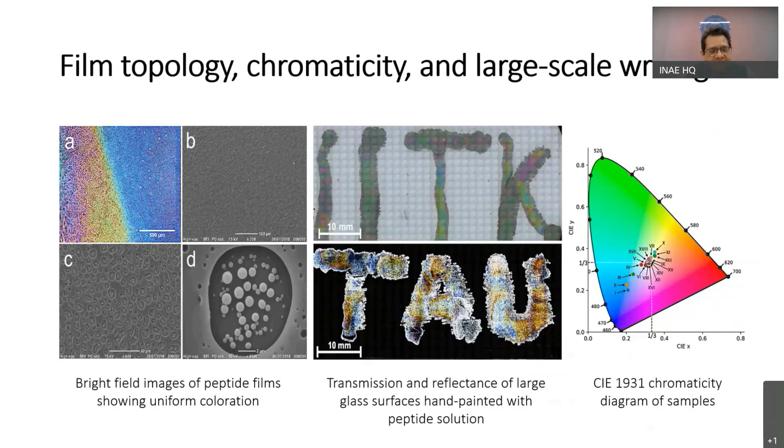We had written the letters IITK for IIT Kanpur and TAU for Tel Aviv University, as it was an Indo-Israel joint project. You can easily see that colors were indeed generated because of these spheres, and we were able to generate a total color palette, shown in this panel on the rightmost side, where the chromaticity diagram shows the kind of colors possible from these spherical or oval-like structures deposited on the surface.

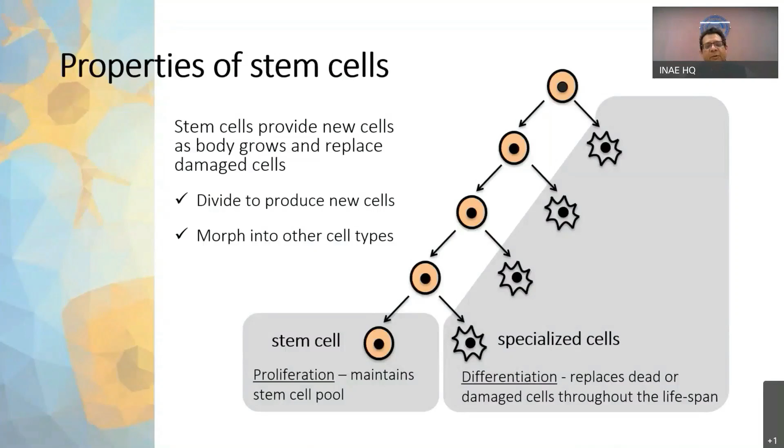We have also worked on stem cell engineering, where we look at fundamental stem cells coming out of bone marrow cells or umbilical cords, taking umbilical cords with due human consideration, using ethical judgments for such type of harvesting. We harvest the stem cells and look particularly at their proliferation, where we would like to multiply these cells under a definite small molecule, which we call small molecule engineering of stem cells.

So what we have done here is primarily look at stem cell biomechanics, whether stem cells, when we have applied our compound, show modified fluidity.

What we have done is put these stem cells on a given surface and looked at atomic force microscopy through AFM indentation studies, where we examined the Young's modulus of these stem cells before and after application of our molecules.

Membrane fluidity of stem cells, once challenged with a small molecule, directly correlates to their proliferation. Soft cantilevers were used, and stress-strain relaxation profiles were generated with AFM indentation. A mathematical expression was used to determine the force constant of this increased fluidity in the stem cell membrane through the Hertz model. This paper is already published and available in the literature.

The force mapping of peptide-treated human mesenchymal stem cells is shown in this slide. We recorded force maps of the human mesenchymal stem cells as a control, where no molecule was applied, and then took three different measurements at different time intervals from the peptides and organic molecules we created for stem cell engineering.

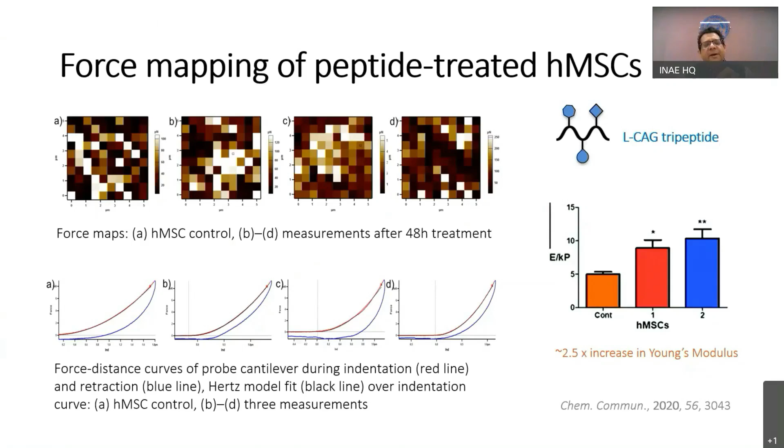This told us that our compound is not only going inside these stem cells, but is also changing their fluidity, which is directly related to the proliferation processes we are going to study. So now the question is, once you have this Young's modulus in your favor, what kind of experiment can one design for stem cell engineering, particularly for proliferation?

And that experiment is what we call the wound formation assay in suspended cultures of stem cells.

Going from left to right: you take a petri dish, inoculate it with a low density of human mesenchymal stem cells, and create or place an artificial insert that acts as a wound-inducing insert. Then you let the stem cell culture grow for about 24 to 48 hours.

After this time interval, if you remove the insert, you would find, quite interestingly, a gap in your culture visible under a microscope - the insert did not permit cells to grow in that given area.

But if you let it proliferate for a while, the view under the microscope becomes totally diffused, as proliferation occurs and cells migrate from one end to the other to close the gap from both sides. It's a small but very compelling experiment, and the results are shown here.

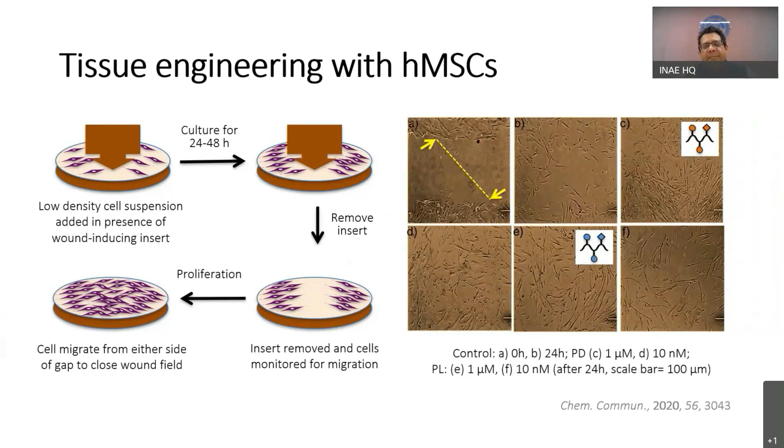If you look at panel A and the yellow broken line, it shows stem cells on both sides with a gap, which is treated as a gap because it was caused by the wound-inducing insert.

Now we applied the two compounds referred to in the previous slide during the AFM indentation study. Under the control experiment and under the influence of these two molecules, we let the stem cells grow.

I'm happy to share that one of these compounds actually accelerated the proliferation of these mesenchymal stem cells. This tells us that synthetically, we can have control over stem cell engineering.

Not only for proliferation and regeneration, but we can also use it to create specialized cells. For example, from stem cells you can go to fat cells, or make other cells of a very special lineage. Having that control over stem cells is the real regenerative engineering of these very fundamental cells that are stem cells.

So we are on the track. We now have a couple of very exciting experiments underway, including one in animal models, where we would like to see if we are able to grow, say, new pancreas-like cells or new heart-like cells.

So that is going to be very exciting for us. So finally, let me tell you a bit about what else we do.

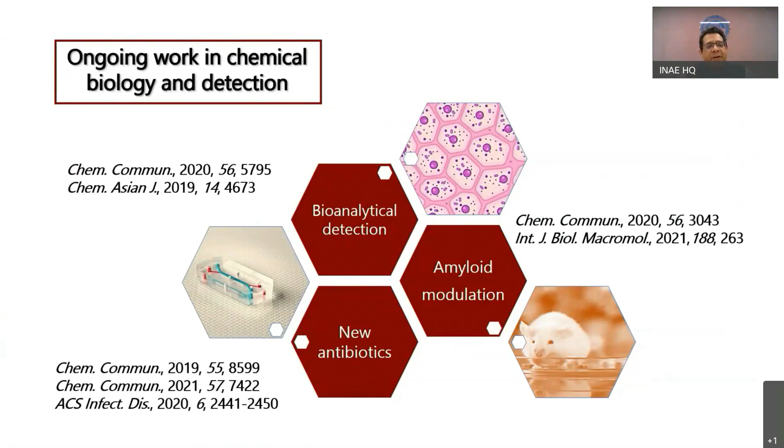We work on bioanalytical detection, new antibiotics, neurodegeneration and neuroregeneration. A lot of papers are presented here, not going through the detail. We also work on conducting materials, the capacitive property of nucleic acid-based batteries, interfacial systems, and computational modeling of many of these systems that we study experimentally.

Finally, I would like to thank my current co-workers, a group of very talented students, about 10-12 PhD students and about 7 postdocs working with me, including my very valued collaborators who work across disciplines and across institutions and abroad. The talk will not be over if I were not to thank the funding partners from Department of Biotechnology, DST Nanomission, SERB. I've not put ICMR - we just received something very special, a project from ICMR on antibiotics and multi-drug resistance.

So all this in a nutshell tells us what we work on, but I hope I'll get another opportunity sometime soon to tell more details about our research.

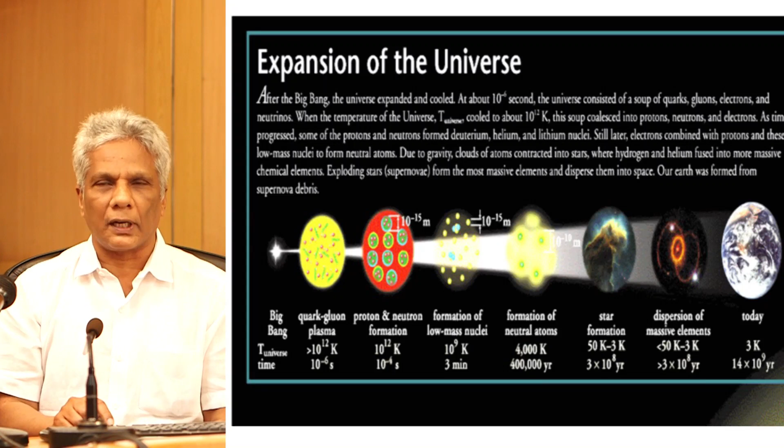But what I will be talking about here is that after the Big Bang, the next circle shows the state where the universe is supposed to be composed of quarks and gluons at a temperature of 10 to the 12 degree Kelvin, after 1 microsecond. We cannot study this state of the universe directly because it has already evolved, but we can recreate it in the laboratory.

For example, if I take two heavy ions, either gold or lead, when they move with relativistic energy and collide, this is what happens.

They collide and then a quark-gluon plasma is created and they expand. This is the scenario which we can create using an accelerator.

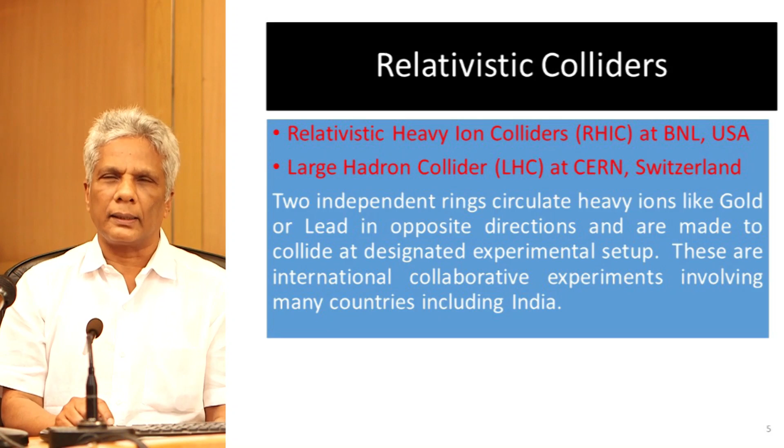My talk will therefore concentrate on two relativistic colliders, both heavy ion colliders. One is located at Brookhaven National Laboratory, USA, and another is the Large Hadron Collider, LHC, at CERN, Switzerland. There are two independent rings which circulate heavy ions like gold or lead in opposite directions and are made to collide at a designated experimental setup. These are international collaborative experiments involving many countries, and India is also a party to these experiments.

First, let me concentrate on the relativistic heavy ion collider at Brookhaven. A fascinating fact about this machine is it is a tunnel underground, 3.66 meters below the ground. Its circumference is 3.84 kilometers. The gold beam is accelerated to almost the velocity of light, that is 99.995% the velocity of light.

It has 1740 superconducting niobium titanium magnets, with thousands of particles produced per collision. At the collision point, the temperature of that tiny system is 10 to the power 12 degrees Kelvin. I recall here, the center of the sun has a temperature of 10 to the power 7 degrees Kelvin, so this is 10 to the power 5 times higher than the core temperature of the sun.

Later on, it passes through stages of accelerators like booster synchrotron, alternating gradient synchrotron, and finally it goes into a collider, storage rings, where it finally attains 100 GeV per nucleon. Inside the storage ring, they are made to collide, and there are 4 experimental points.

One is called Phenix, Phobos, Brahms, and Star. The Indian community, particularly BARC, participates in this Phenix experiment. Phenix stands for Pioneering High Energy Nuclear Interaction Experiment, and it is a mega scale detector having several types of detector.

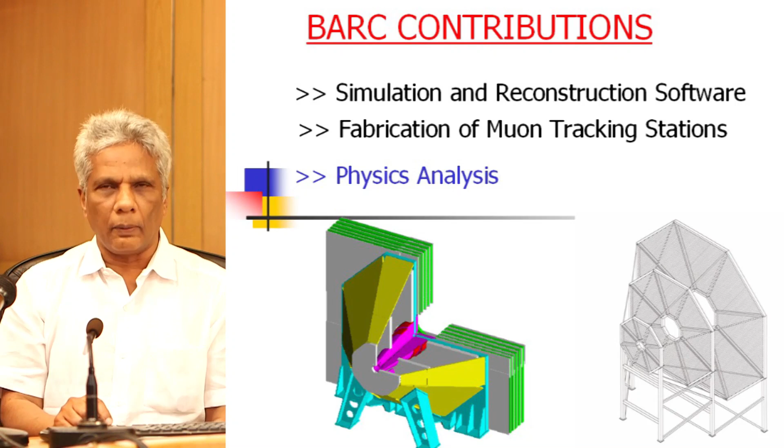Here, our contribution has been that we participated in the simulation and reconstruction software. We participated in the fabrication of muon tracking stations at BARC, and we also participate in the physics analysis.

More explicitly, we developed PISA, a Phenix Integrated Simulation Application, development of tracking of particles using artificial neural networks and principal component analysis based pattern recognition, multi-level trigger algorithms, hardware and software optimization, and finally sophisticated physics analysis.

PISA is a solely important simulation tool for this Phenix experiment, and BARC and Vanderbilt University, USA were solely responsible for its development.

Another accelerator that participated in this experiment is the Large Hadron Collider at CERN, which you all know, because this is the accelerator where 2 protons move in opposite directions and collide. The primary motivation of this experiment has been to collide the protons to create a Higgs boson, popularly known as the God particle.

But there is also another program to collide lead ions moving in opposite directions to create what I call the quark-gluon plasma, or the mini universe.

In this Large Hadron Collider experiment, India has strong contributions, like RRCAT, Raja Ramanna Center of Advanced Technology, and Bhabha Atomic Research Center, which have contributed significantly in grid computing and supplying various components of the Large Hadron Collider accelerator. The items mass manufactured in India and delivered included precision motion positioning systems, PMPS jacks, superconducting corrector magnets, heater discharge power supplies, local protection units, etc., to name a few.

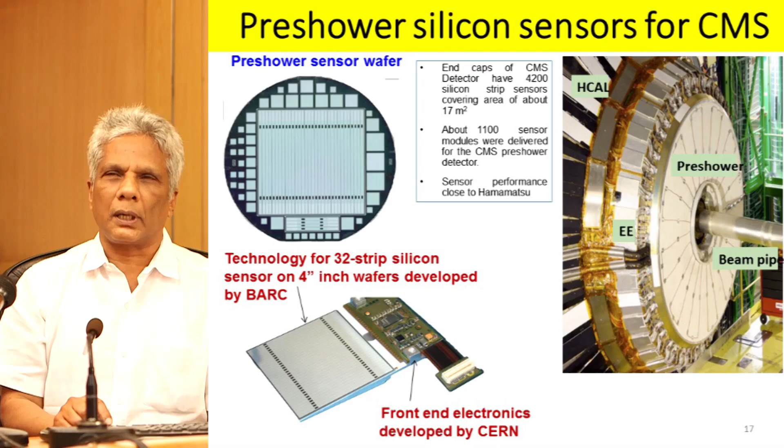This is how the pre-shower silicon sensor looks. It is the 32-strip silicon sensor made up of 4-inch wafers developed by BARC, and the bottom one shows the front-end electronics developed by CERN. Both are integrated, and on the right-hand side it is all mounted. This is part of the CMS detector, and the pre-shower comes at the end close to the beam pipe, and this is where the silicon strip detectors of BARC are located.

Another area where BARC is participating is resistive plate chamber detectors, RPC. BARC has also taken part in making resistive plate chambers, a new type of large-area gas detector, crucial to signal the passage of a muon through the CMS detector. The Nuclear Physics Division of BARC and Punjab University Chandigarh jointly built, assembled and characterized about 70 resistive plate chambers for the CMS upgrade, along with copper cooling systems.

Now I will come to what results we have got out of these two big experiments. I will mention the Relativistic Heavy Ion Collider at Brookhaven, the world's first heavy ion accelerator. It started collisions sometime in the year 2000, major results started coming from 2001 onwards, and the full gold run was completed in 2002. Later on, the deuterium-gold control experiment was carried out in 2003.

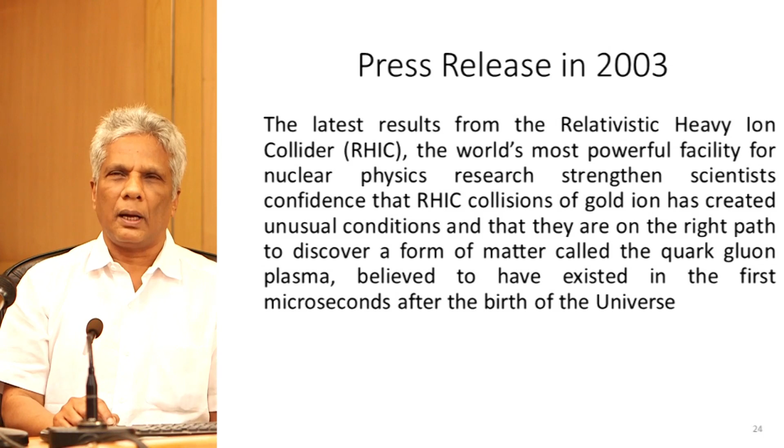Later on, these experiments were confirmed, and all the results were published in several important journals, including Physical Review Letters, along with many more highly cited papers and experimental results. This is the story of the experiment carried out at the Relativistic Heavy Ion Collider.

Later on, after a decade or so, the CERN experiments started. CMS and ALICE are experiments which also carried out heavy ion collisions, creating the quark-gluon plasma, the so-called mini-universe. I will not go further into that.

I will just summarize by saying that subsequent experiments using the Relativistic Heavy Ion Collider at Brookhaven National Laboratory and the Large Hadron Collider at CERN, on many aspects of heavy ion collisions including measurement of flow velocity, viscosity, jet quenching, etc., have proven beyond doubt that heavy ion collisions at high energy create a new state of matter comprising quarks and gluons at extreme temperature and density, a state mimicking the conditions of the early universe a few microseconds after the Big Bang. This is an important scientific discovery describing how normal nuclear matter undergoes a phase transition to a deconfined state of quarks and gluons under extreme temperature and pressure.

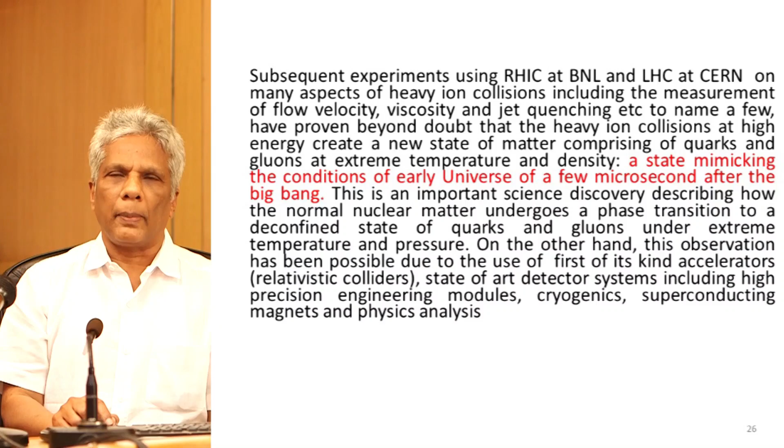This observation has been possible due to the use of first-of-its-kind accelerators, relativistic colliders, state-of-the-art detector systems including high precision engineering modules, cryogenics, superconducting magnets, and of course finally the physics analysis. I think I'll stop here. Thank you and Jai Hind.